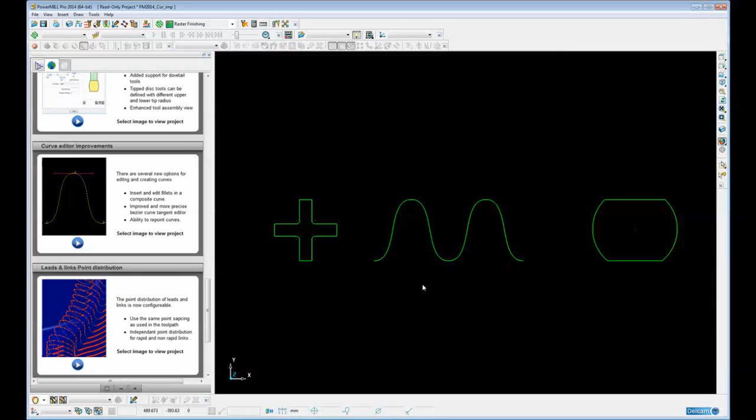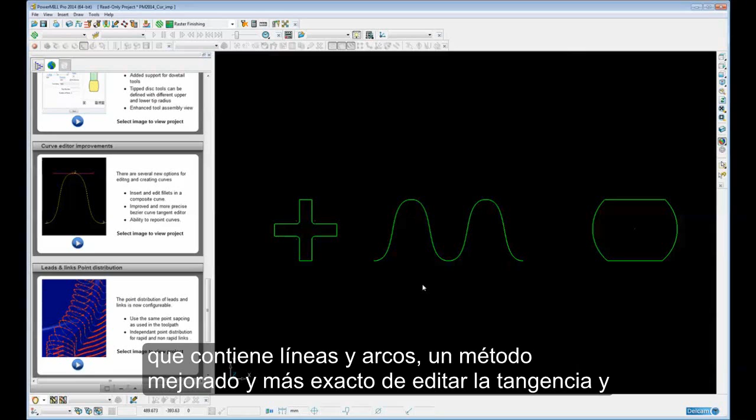There are several new options for editing and creating curves. These include the ability to quickly insert and edit multiple fillets within a composite curve containing lines and arcs, an improved and more accurate method of editing the tangency and magnitude of points within a Bezier curve, and finally the ability to repoint curves. So let's have a look at these new functions in a little bit more detail.

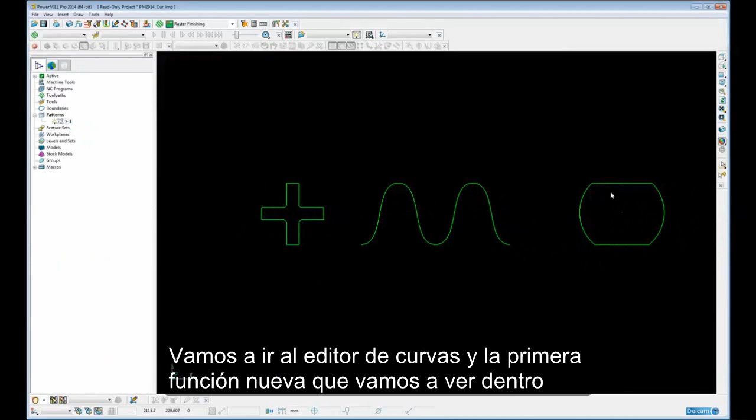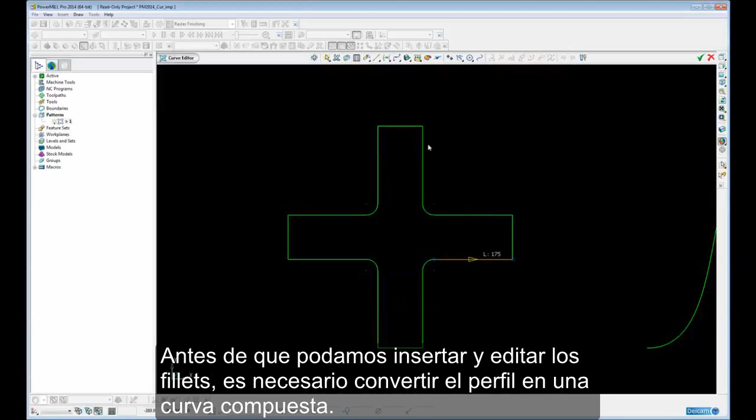So here we have on the screen a single pattern with multiple segments. So I'm going to go into the curve editor, and the first new function we're going to look at within the curve editor is the ability to insert and edit fillets within a composite curve. Now at the moment, this what appears to be a closed profile is actually made up of a series of individual lines and arcs. So before we can actually insert and edit fillets, we need to convert this into a composite curve. So we simply select it and merge the selected segments into a single curve, and this is a single curve made up of arcs and lines.

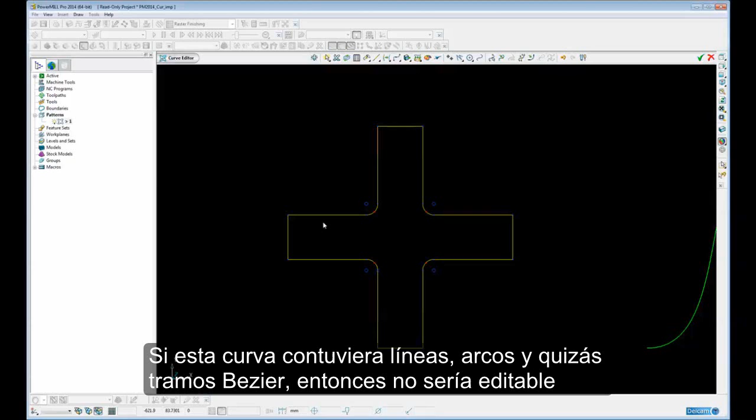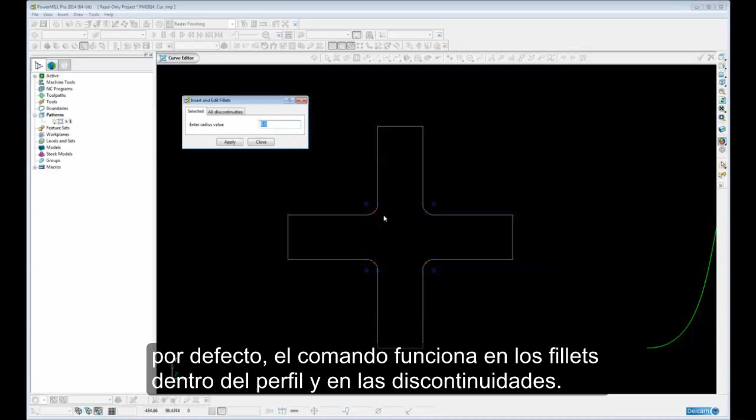So now when we select the curve, you can see the insert and edit fillets command becomes available. If this curve contained lines, arcs and maybe Bezier spans, then this would not be editable using the insert and edit fillets command. But because it only contains lines and arcs, we can come into insert and edit fillets, and by default the command works on existing fillets within the profile and discontinuities.

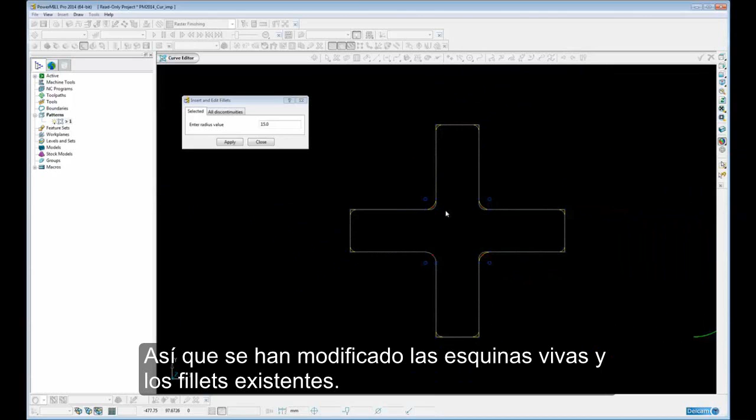So if I change this to say 15, you will notice that all discontinuities have been filleted, plus the existing radius fillets have been modified to 15. Okay, so sharp corners and existing fillets are modified. If I want to keep the original radiuses within the curve, then I simply select the discontinuities option, and only the sharp corners will be filleted. Let's just change that to say 30.

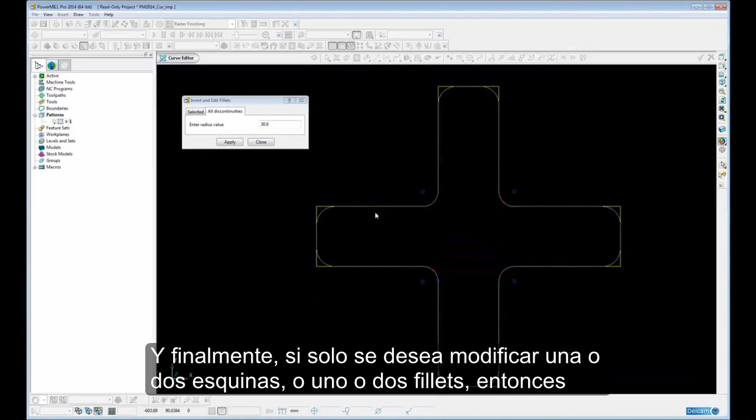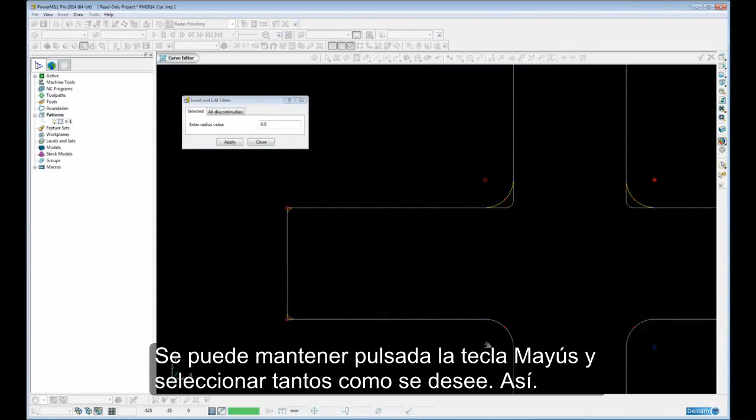And finally, if I only want to choose one or two corners or one or two fillets to modify, then I simply go back to selected and just click on whichever corner I want, including sharp corners and fillets. Let's make that smaller so we can see it. Let's make that 8, and select this one, maybe make that 6, or that one, and I can hold down the shift key and select as many as I want, like so.

Let's change that back to all discontinuities and just finish off by putting a 40mm radius, and then apply and close. Okay, so that's the first of the new functions.

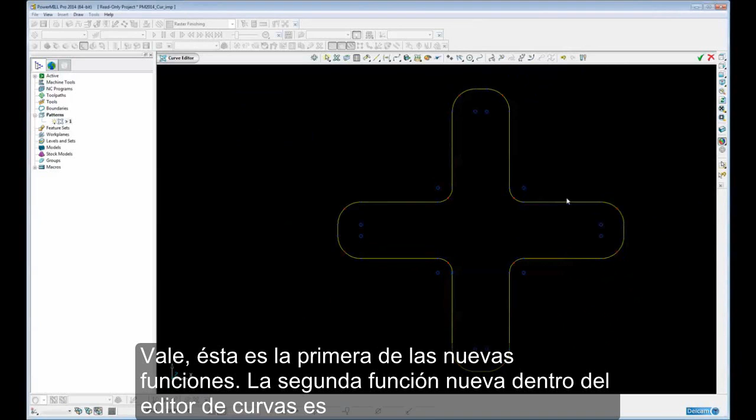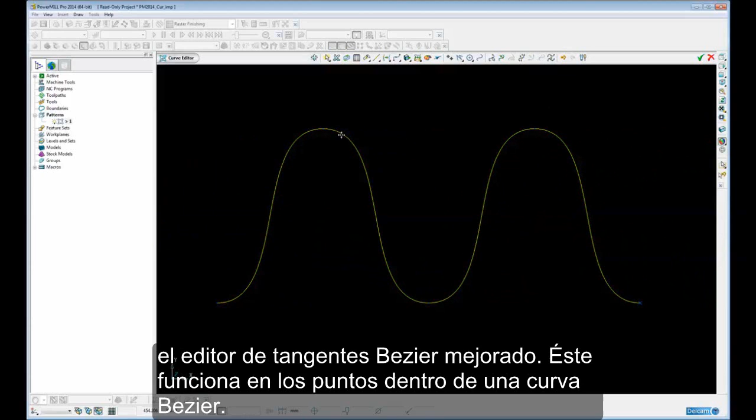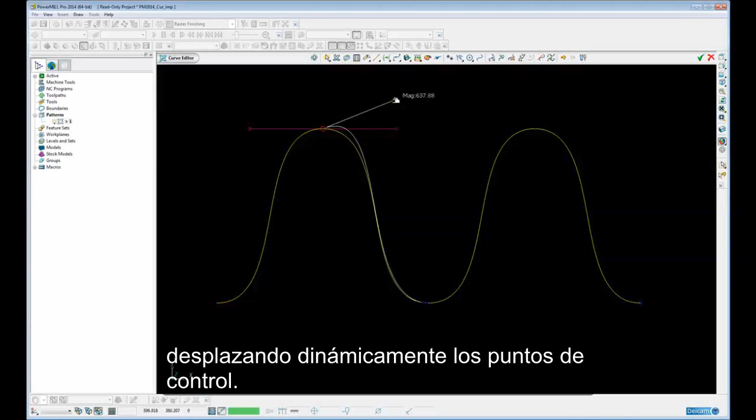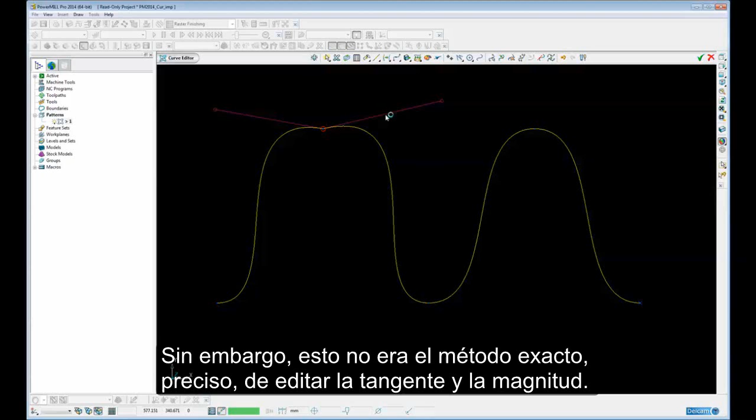The second new function within the curve editor is the improved Bezier tangent editor. So this works on the points within a Bezier curve. So if I select a point, you can see that the option becomes available, edit the tangents. In previous versions of PowerMill, we could edit the tangents by graphically dragging and dynamically moving the control points. However, this was not an accurate, precise way of editing the tangent and magnitude. So let's undo that and get back to the original shape and select the point again.

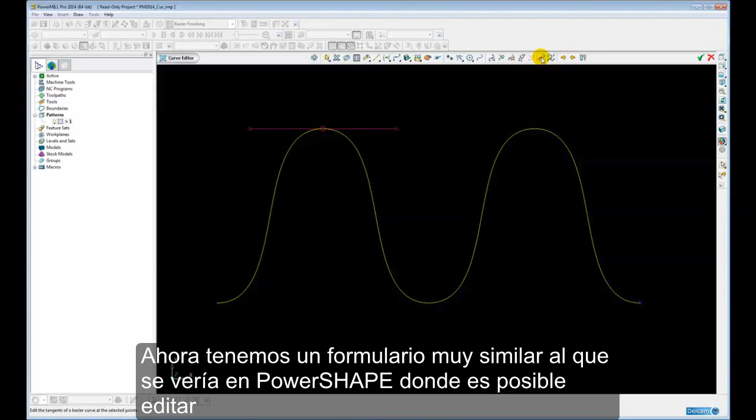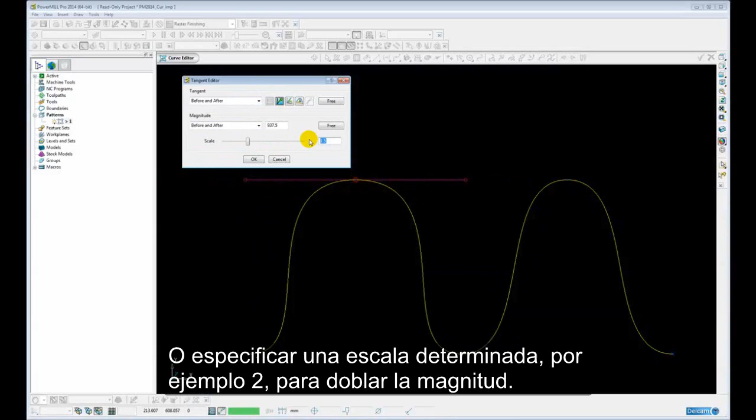Now we have a form very similar to the form that you will see in PowerShape, where we can edit the tangent before and after the point, and also the magnitude before and after the point. So for example, we can simply scale the magnitude if we wanted to, or specify a specific scale such as 2, so double the magnitude, and then we'll just set that back to 1.

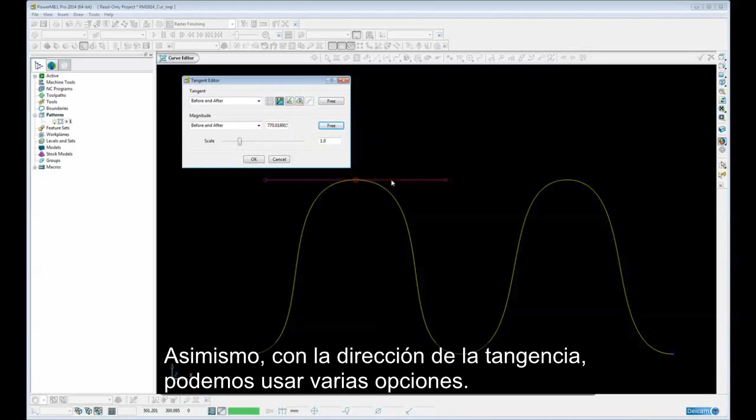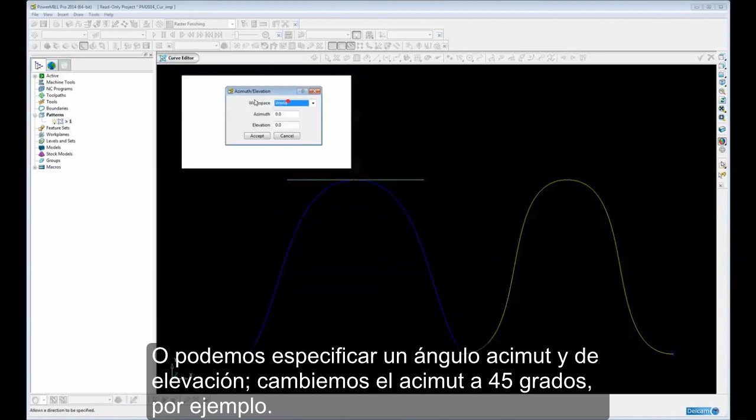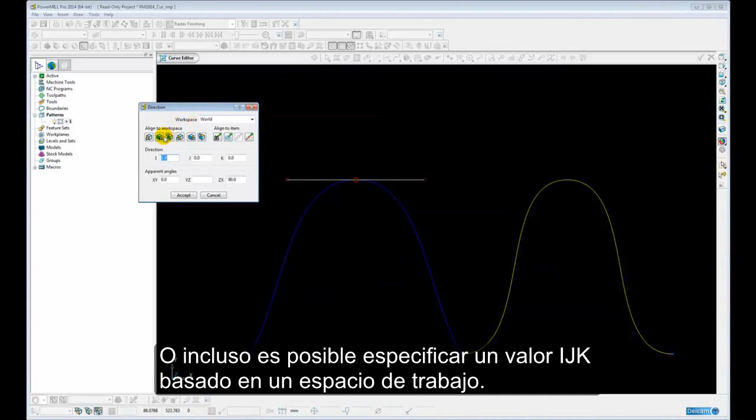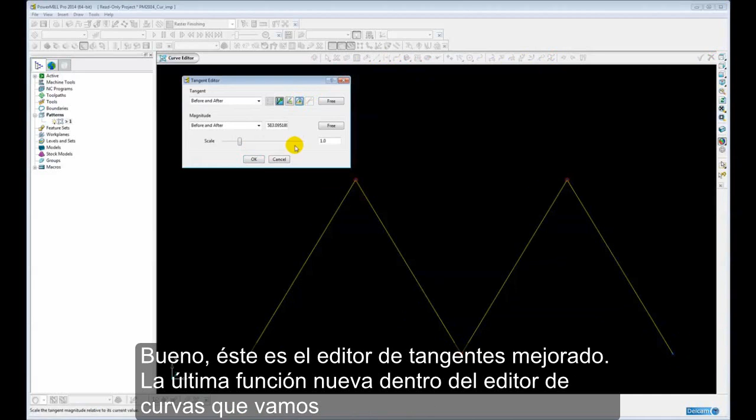Likewise with the actual tangency direction, we can use one of several options. We can straighten the tangency, for example. Let's just free that back again. Or we can specify an azimuth and elevation. Let's change the azimuth to 45 degrees. Let's just cancel that. Or even specify an IJK value based upon a workspace. If we want to do more than one point at the same time, we can do that by simply shift selecting multiple points, and then we can straighten all those points in one go. So that's the improved tangency editor.

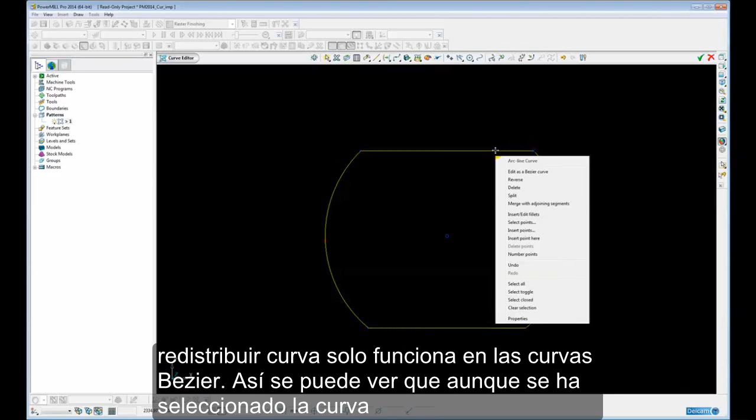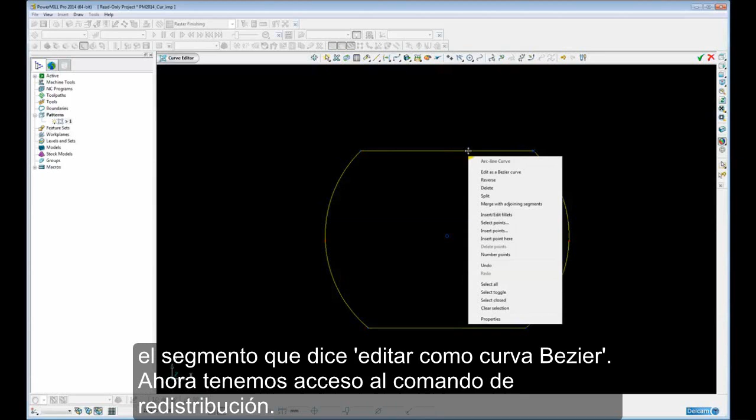The final new function within the curve editor we're going to look at is the repoint curve option. At the moment, this curve is defined as a series of lines and arcs. Now the repoint curve function only works on Bezier curves, so you can see even though I've selected the curve, the repoint curve function is greyed out. If I wanted to edit the points in this curve, I would have to convert it into a Bezier curve or edit it as a Bezier curve. There is a new option when we right click on the segment that says edit as Bezier curve. Now I have access to the repoint command.

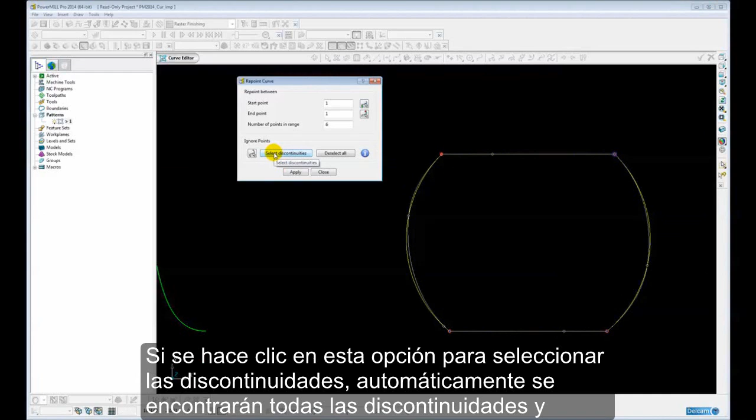So you can see the default number of points is 6, so it's actually repointed the curve to have 6 points, and because by default it doesn't maintain discontinuities, you can see the shape has changed quite dramatically. If I click on this option to select discontinuities, it will automatically find all the discontinuities and make sure those points are kept, and it will repoint in between. So obviously there's still not enough points to hold the shape, so let's increase that to say 20, tab, and that gives me a much more accurate comparison to the original curve.

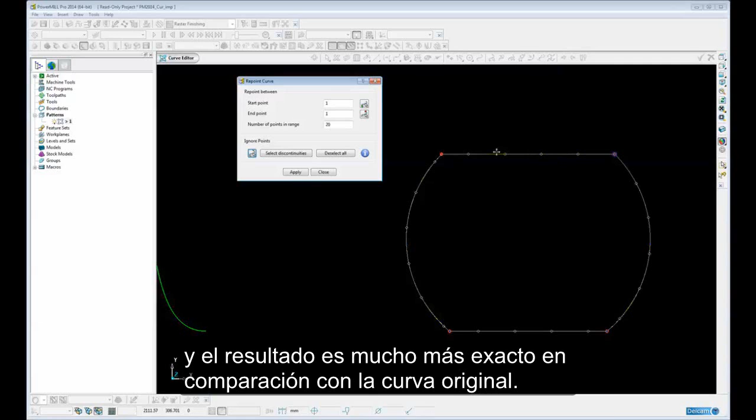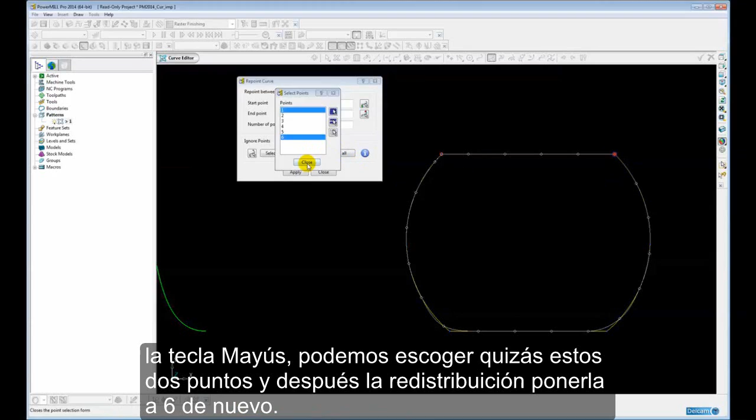If I deselect all the discontinuities again, if I wanted to, I can choose individually which discontinuities I wanted to keep simply by clicking on this icon and then holding down the shift key. I can choose maybe just those 2 points and then repoint maybe to 6 again. So you can see those 2 points have been held, and the remainder has been repointed to 6. Let's just deselect all those again.